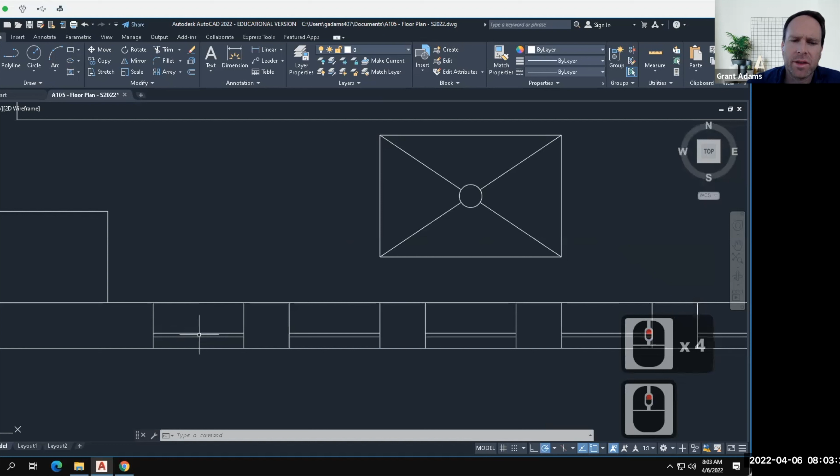Remember, the most basic window looks something like this. I've put 2 lines in for the double thickness of the glass. If you wanted to just do a single line, there's nothing wrong with that. And as of right now, everything that you've drawn is probably on the topography layer. And I think in this drawing, it's actually not on the topography layer. So let me switch it so that it matches what you're seeing. There we go. It's on the topography layer. And that's how you probably drew it.

Now, first thing we want to talk about today is layers and layer order and kind of how you organize your drawing. And so layers are something that we've obviously used in Photoshop and InDesign, Illustrator, but in AutoCAD, they become very, very important, and they're a key factor in how you organize your work. And if you go to work for, say, a firm, that firm is going to have a specific layer structure and a specific naming scheme that they tend to follow and that you'll be required to learn and or follow.

For our purposes today, we don't really have a set naming scheme that needs to be followed. You can name the layers anything you want. What I typically do is I tend to follow the most common practice of layer names. And so if we're going to follow a common practice, let me show you how to do it. So up here, we're in the home ribbon. At the top of the page, we have a big button that says layer properties.

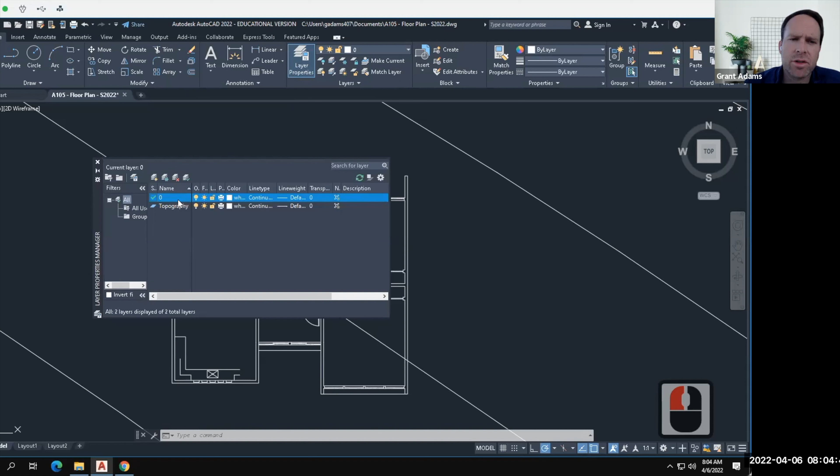If I were to click on that layer properties, it will bring up this layer properties manager little floating window here. And this layer properties manager shows us what our current layers are. So right now I have a layer 0 and I have a layer called topography. Yours is going to match up the same as mine. But we have some other information about these layers. So first off, we have an on and off switch. So it's a little light bulb that turns the layer on and off. If we turn the layer off, the content that's on that layer will turn off.

Next to that, we have a sun. And so this is something called freeze and thaw a layer. And this is actually a really strange holdback. I'm kind of surprised that they haven't gotten rid of this. This is a holdback to the really old days of AutoCAD. So think like in the 80s and 90s when AutoCAD was first around, it was really taxing on a computer to keep information stored in memory. So turning on and off a layer keeps the information on the layer in the computer's memory. It doesn't actually get rid of that information.

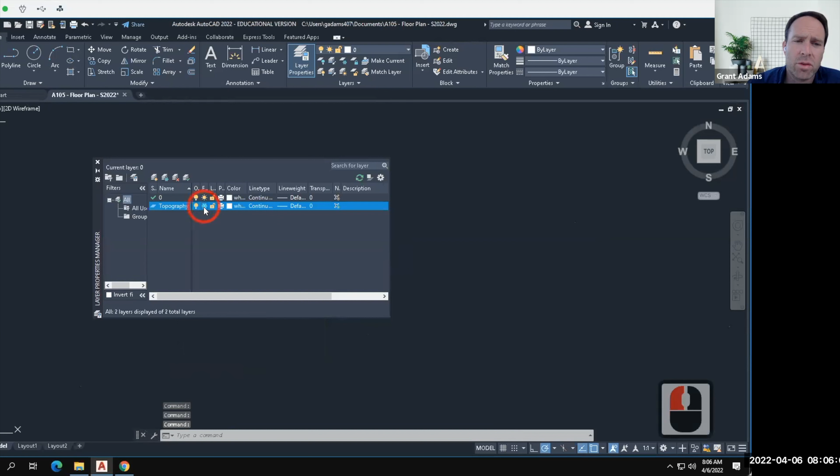And so they invented something called freeze and thaw. And when you freeze and thaw a layer, it actually takes the information of a layer out of the computer's memory, and then you put it back in when necessary. In our world today, computers are so powerful that it really doesn't make any difference whether you freeze and thaw or turn on and off a layer. It's not relevant, but it's a holdover, so it still exists. So the freeze and thaw, for your purposes, does exactly the same thing as the on and off.

So whether you use on and off or whether you use freeze and thaw doesn't really matter to me. I tend in lecture to use freeze and thaw because that's old school, and I learned AutoCAD in the 90s, so that's the way it is. Next to that, we have a lock button, and that padlock, when we lock it, will make it so that we can't select or trim or modify the layer that's been locked.

So we'll go ahead and unlock it so we can keep working with it. Next to that, we have a little printer icon, and this controls whether or not a layer is a printing layer, whether it will plot with the drawing or not. If I change this to not, and we were to print this, everything that's on this layer wouldn't be printed. And this is actually really beneficial long-term, and we'll be creating some layers that are non-printing layers on purpose, and I'll show you that when we get there.

Next thing we have is color. You see right now that the layer color is currently set to white. This white color is the one that turns black when we go to print. And so that's set to make it easier for us to draw and to see on the screen. It's set as white. You have the ability to change colors to any other color should you want to.

Some firms assign line weight by colors, so they have specific, basically thicknesses of lines that would be assigned to specific colors. I don't encourage us to do that in this class because that varies by firm, and so it's not as consistent as just assigning the line weights manually. So we will get to that a little bit later on.

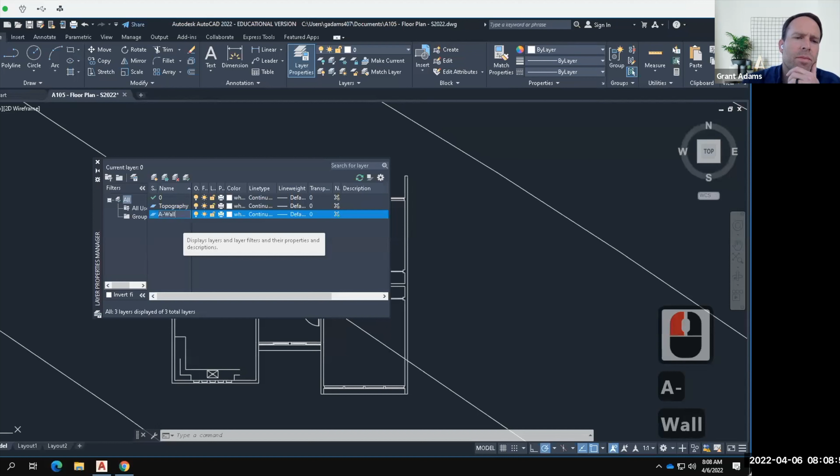So we want to separate our content out in a way that would be fairly traditional, and that is that we're going to keep the walls separate from the windows, separate from the doors, separate from the fixtures and content that's in the building. So my first layer, I'm going to rename it to be A-wall. And this is a pretty common practice where A denotes that this is an architectural input. So it's the architecture that's going on the layer A.

If you were an engineer, you would use E. If you were utilities or doing something like that, it would be U. If you were doing mechanical, it would be an M. So it's just a way of kind of organizing the layer. We're in architecture, so we're going to do A-wall as our first layer.

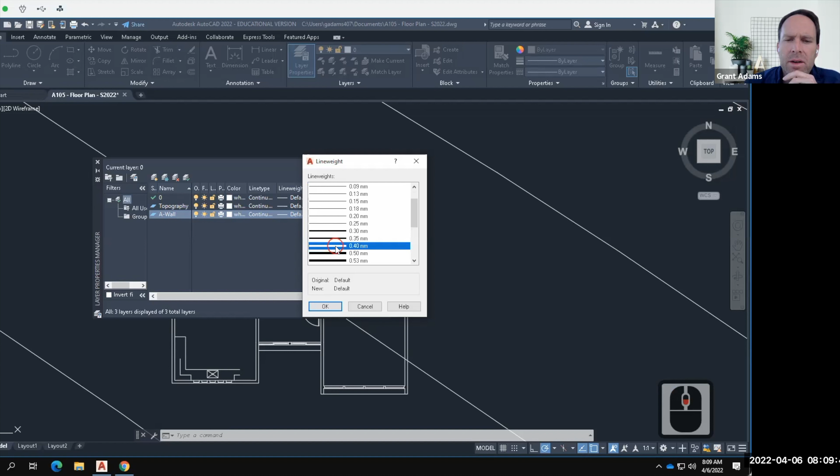Now, as we come over here, obviously we want the wall, everything to be on, but we want to change the thickness of the wall. And generally the thickness of the wall is the most thick in terms of a line weight. So I would come down here and I would say maybe 0.4 millimeters as our line weight would be appropriate. So I'll select 0.4 and I'll say, okay. And you'll see that my default line weight on that layer is now 0.4. That means anything that's on that layer will have a line weight of 0.4.

So we'll come back and we'll create some more layers, but let's talk about moving an object to a different layer. So let's close the Layer Properties Manager altogether. And now if I were to select a wall, so I'm dragging a little box through my wall here and I'm selecting some pieces of the wall. Once I have that wall selected, I would come up to my layer properties here, click this little drop down. Right now it says topography.

If I click that drop down and I choose A-wall, it's going to change all of those to the wall layer. Now I'm not actually seeing the line weights because they're not turned on, they're not enabled. They would show up when I print, but they're not enabled. If I wanted to see those, I could come down to these 3 lines in the bottom right corner. And oops, it's behind my Zoom window, so hang on for just a second. There we go.

When I do that, I could choose line weight, which turns on the button right here, and then click it and you'd see those lines get thicker. AutoCAD does not do a particularly good job of displaying line weights. Sometimes they look really fat, really thick, which is a little unrealistic long-term, but they're there and you can tell they were on a layer. I'm going to turn them back off for right now.

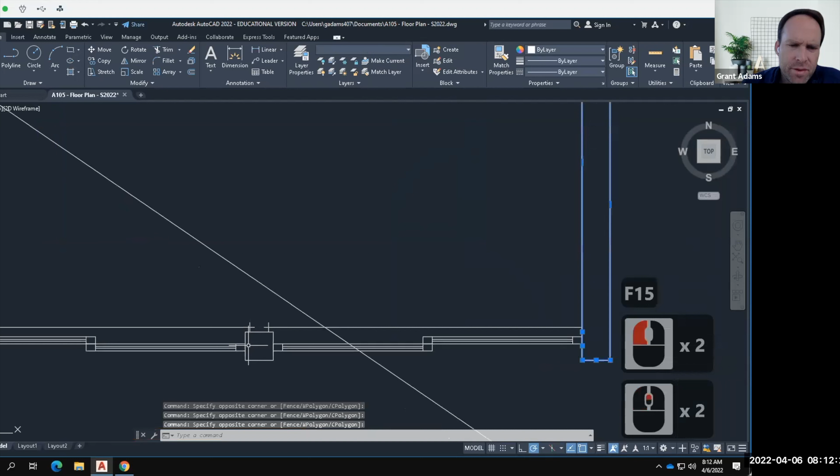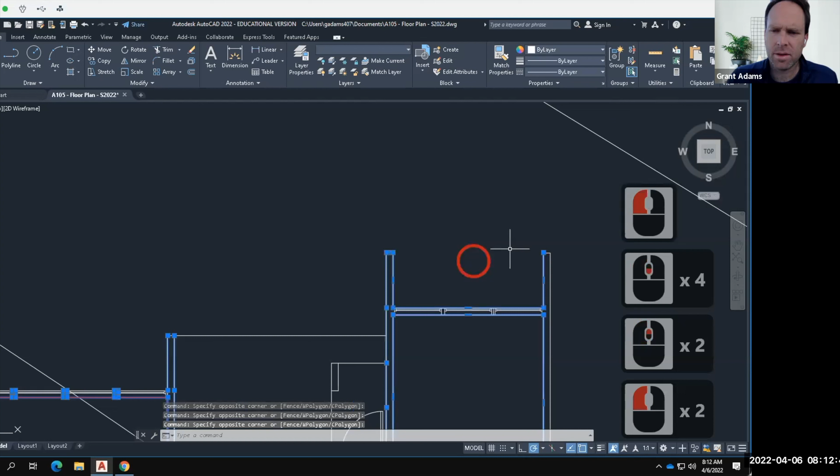I apologize, my connection to the remote desktop is a little slow today. I have to be patient while working with it, but let's get the rest of these. Come in here and get these little divisions.

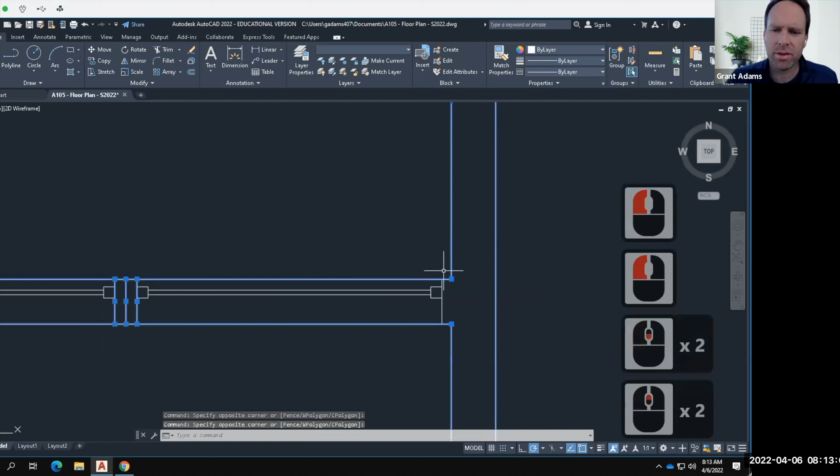So when we're looking at the walls layer, we want the lines that represent the sides of the windows to be selected in addition to the outsides of the walls, and those are all going to show up. Let's see, we've got that over here.

Remember, all I need to do to change this is go up to my layers, click this little drop down, and change to A wall, and we'll see all of those turn red. A little bit more, so bear with me as I get through the last of this.

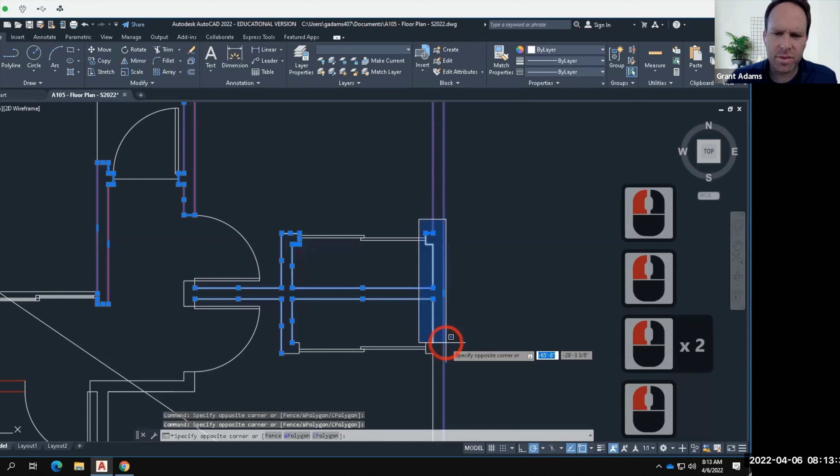It's always one of those fine balances where I want to make sure I'm including what I'm doing so you can see me do it, but I also hate wasting your time watching me click and click and click. So I apologize for that time delay, but it is what it is. Let's see here, let's do this.

We're almost there. Oh, looks like there's an error in my drawing. We'll have to fix that a little bit later. And we're almost there.

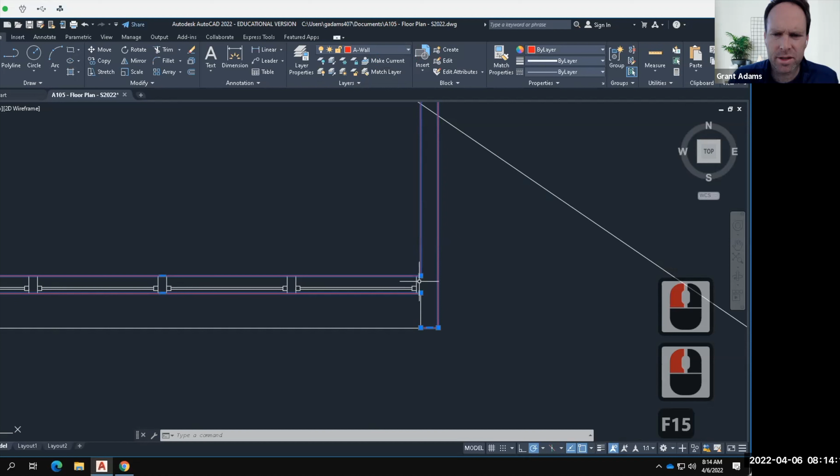Let's go ahead and change those all to the wall layer. One more quick selection here, and those would all be on the wall layer as well.

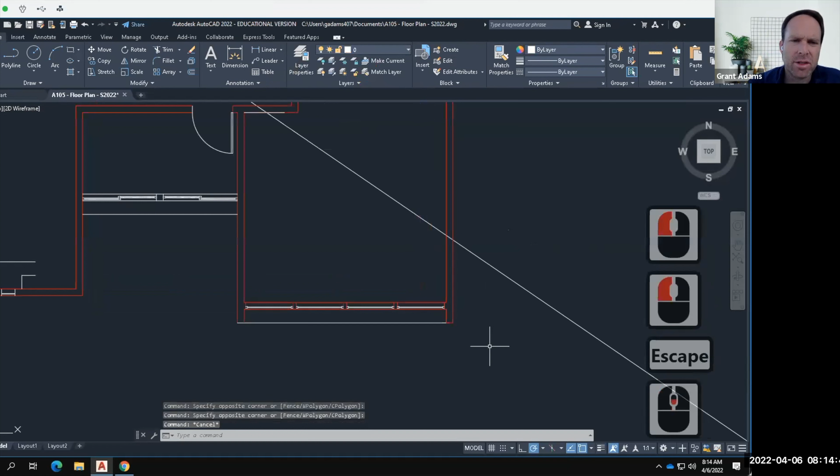Okay, so now I've officially gotten everything, I think, on the walls layer like it should be, except for that one little line. One of the things you'll find doing this is sometimes you miss a few lines, and you can always come back and get it. That's part of why changing the color temporarily is useful, because you can quickly see, oh, this was included, this wasn't, I made a mistake there, etc. So let's go ahead and get this one.

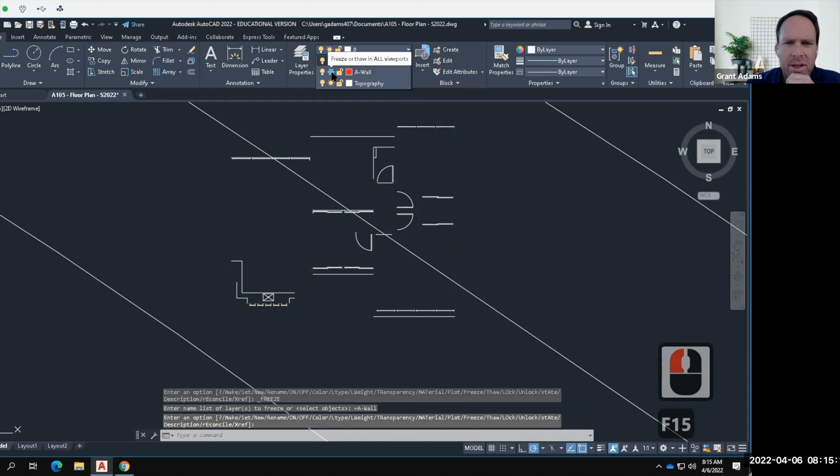And we'll change that one as well to the wall layer. Okay, so now I have the walls pretty much selected. Once they're on the walls layer, it makes life much easier because we can turn off — remember, I have the freeze and thaw button — I can turn off all the walls and then look at what's left. That would then make selecting the windows or doors that much easier.

So let's go back into my layer properties again, and we'll click on the little plus sign here to create a new layer. This is going to be A-door. And there it is. For our doors, this is something that can be helpful if we pull up the line weight guide that's attached to your...

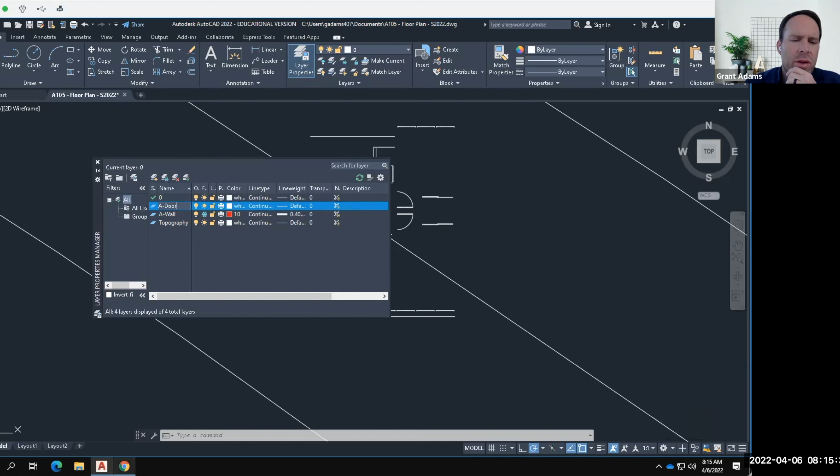And I apologize, I don't have... I'm not already logged in here. Hold on a second.

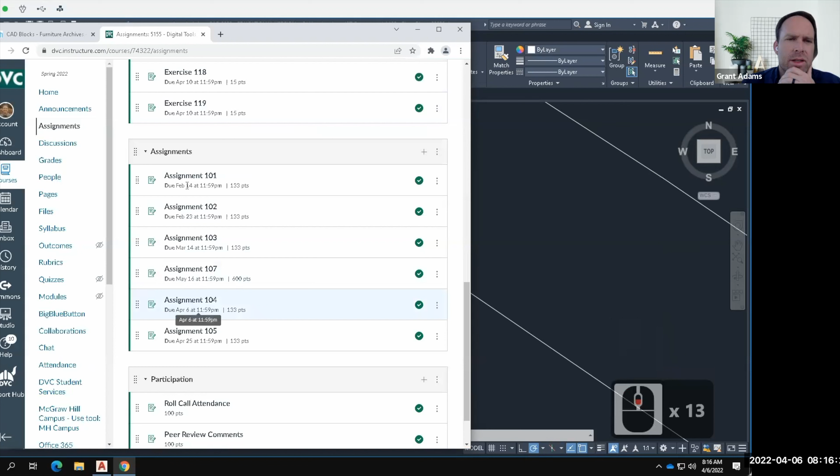Okay, so I included this as a guide for you so you can reference what appropriate line weights would be. Let's come down here into today's exercise, exercise 119. If we scroll down, this sheet will give you an idea of what the various line weights should be. So if we look over here at a wall, I have 0.4 millimeters in black.

So our window glass is 0.00. Our door — now in an ideal world you have different door thickness and door swing, I'm going to do everything at 0.18. So let's come back here, and my line weight for the A door layer is going to be 0.18. There it is, we'll go ahead and say okay.

Now all I have to do is select the doors and move those onto the layer. Remember, I turned off the walls, so that makes selecting the doors that much easier. So let's select these doors.

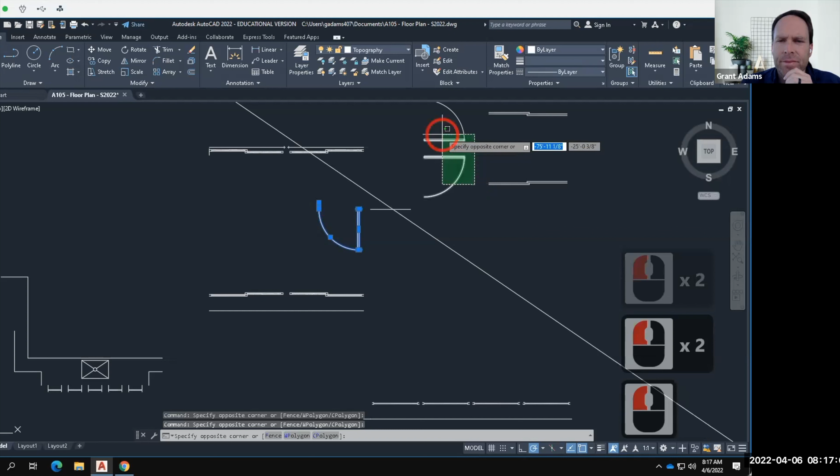All right, so those are all the doors. We can change those just the same way. We'll click that drop down and change to a door, and those are now on the door layer. I can turn off the door layer by clicking the freeze icon.

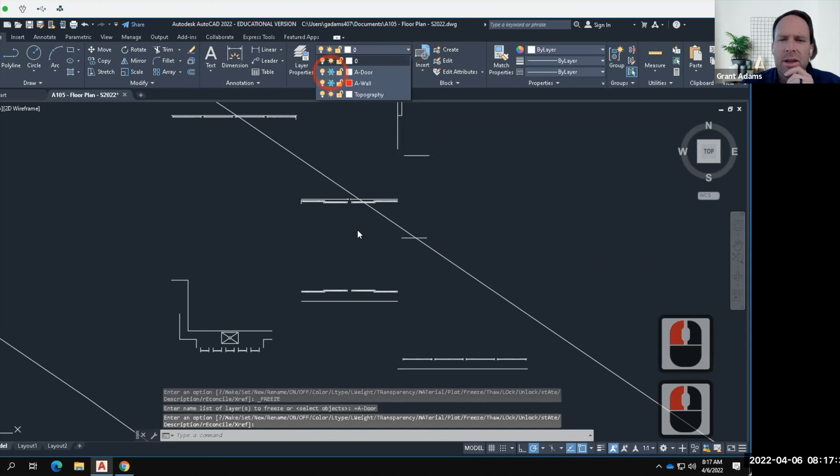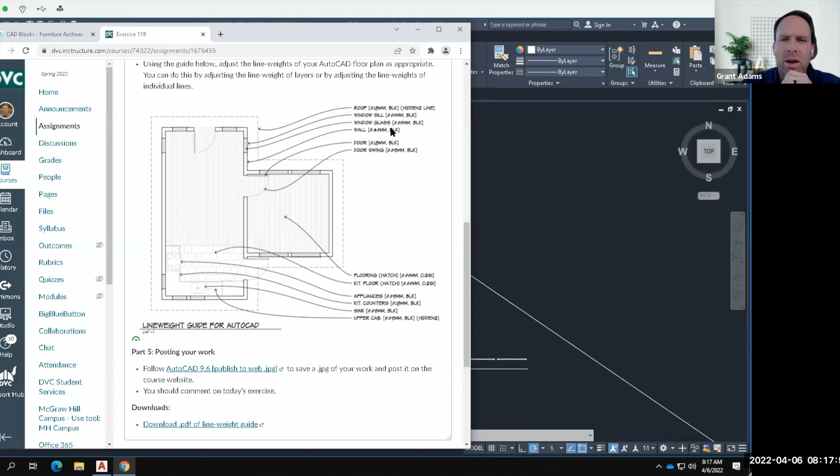So now I just have to go in, close this, and select all of those windows. Let's select those windows there, select these windows here, select these windows here. It looks like I missed a few lines.

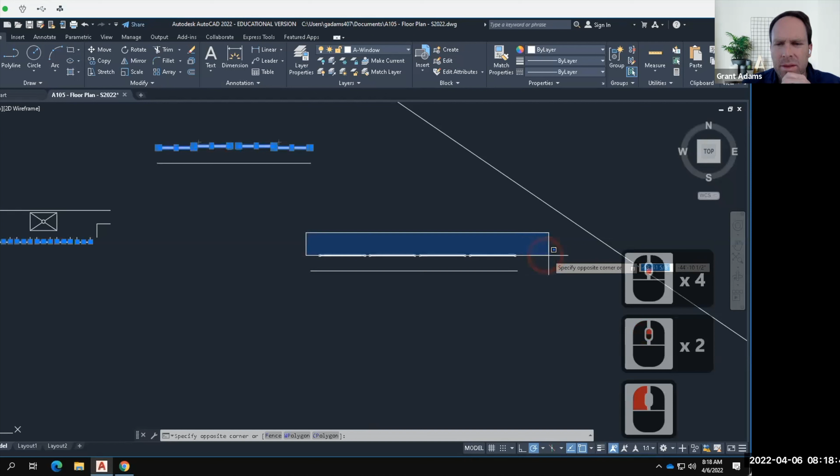It should only be the glass that's on the windows layer, so let's put all of those on the windows layer. There we go, all right, they're on the window layer. Oops, I missed these, so let's select all of these and put them on the window layer too. A window, perfect. So now I have all of those except for those windows on the windows layer.

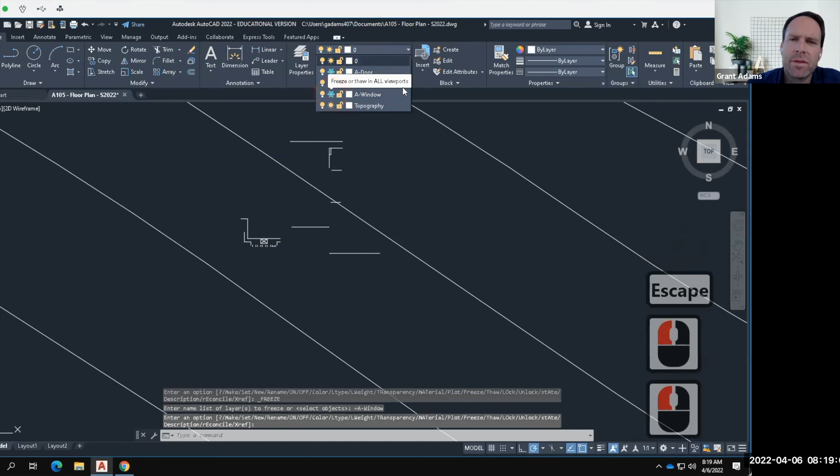So it takes a little bit of time to organize this, but you can see how once I start to have this set up, it makes it much, much easier to work with. So now as I'm turning these off, I can kind of see what I've missed. Looks like I missed a little section of wall right here that should go on the wall layer, so we'll select that and put it on the wall layer.

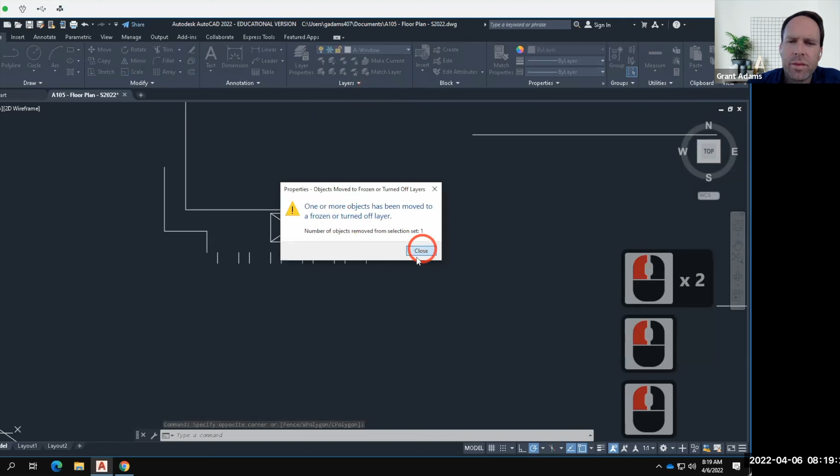All right, and oops, this is on the window layer. That's just warning me that my object is going to a layer that's turned off. So we're adding that to the wall layer there.

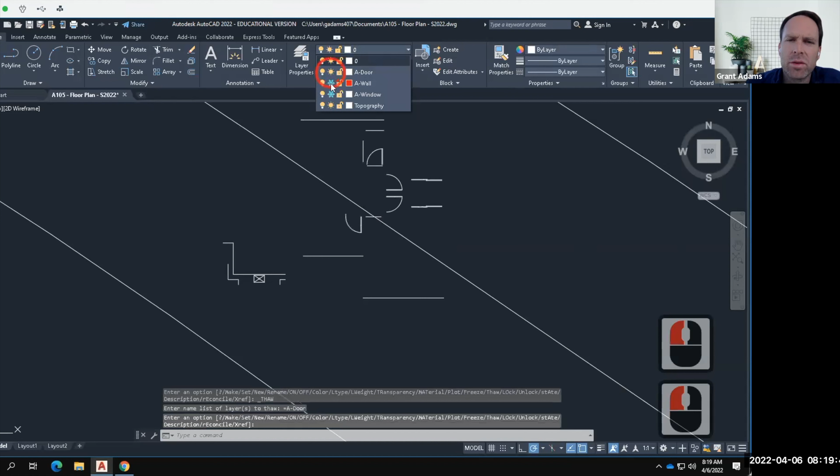Okay, so now that we have those relatively aligned, these extra lines are representative of other things in my floor plan. Let's go ahead and turn them back on. We'll turn back on the doors, we'll turn back on the walls, we'll turn back on the windows. Now we can kind of see the building as a whole again. So as we move forward, we may need other layers to start to identify what's going into our building.

For example, we have a kitchen that's been kind of laid out here, and so in this kitchen I may want to put those lines on a layer. I tend to do a layer called A-fixtures for things that are built in, so these are like kitchen cabinets and that sort of thing. And we'll leave them set.

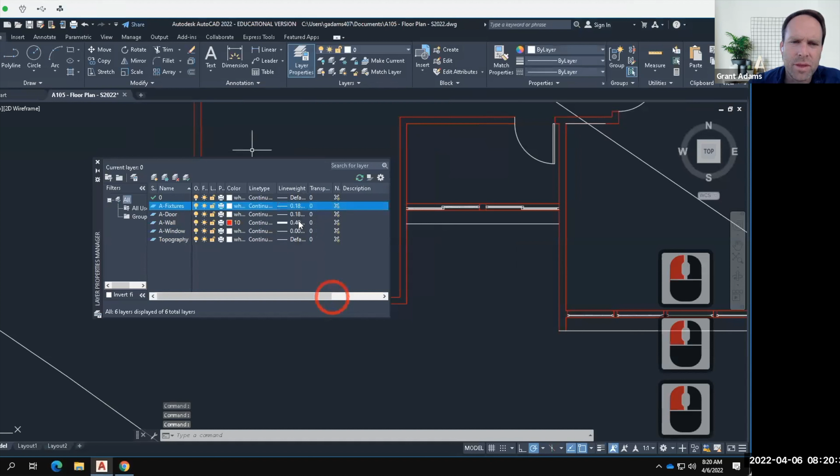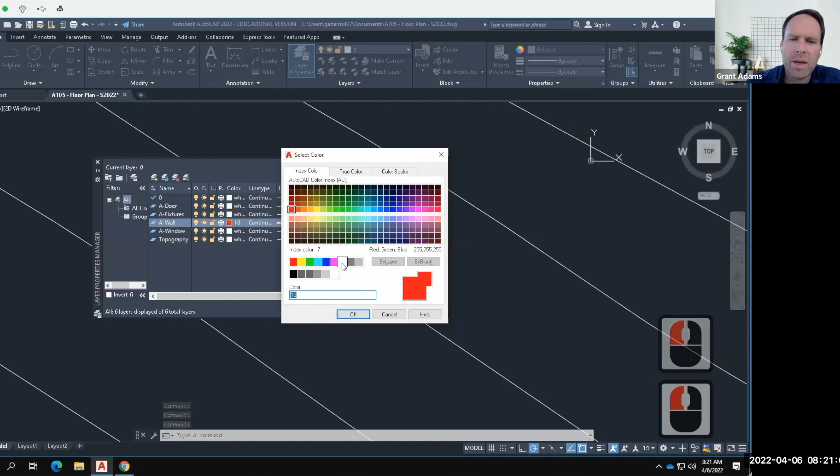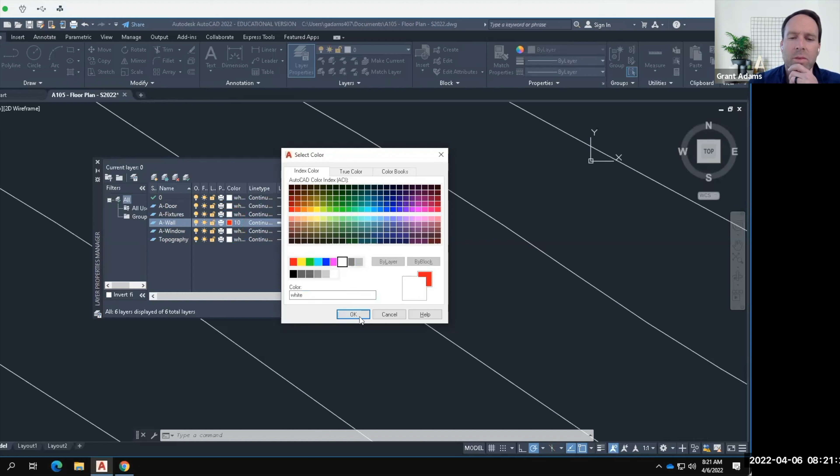So at this point, if I were to turn my walls layer back to white, it is important when I do that, we don't want to pick the white here. See that index color 255 at the bottom? That one will actually stay a very, very light gray on a print. We instead want to pick this one, index color 7 - that's the magic color that will turn black when we go to print it. Some of you, if you select the wrong one, will have trouble when printing because it won't show up. But that's okay, that's what I'm here for, so we can fix it.

Okay, so now all of those are back on. I could turn on my line weights temporarily. I can click the little line weights button here and we can see that yes, some line weights have been assigned. Anything below 0.3 are really not going to show up as line weights in AutoCAD - they just don't preview well.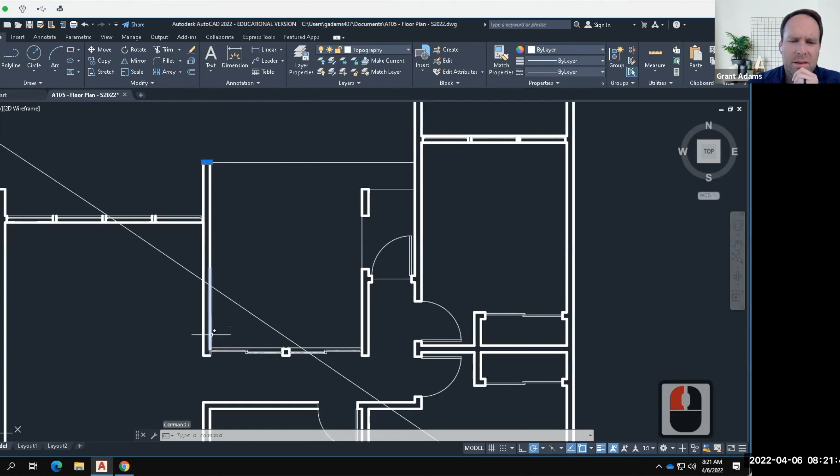It looks like there's a few little pieces that I missed, like that piece right there should be a wall. And there's always going to be some of those little details that need to be addressed as we go forward. So the next part of this is that you may want to include some furniture to represent what's happening in these rooms.

So for example, I have a kitchen here, maybe a bathroom here, and a couple bedrooms and a little bit of outdoor space. As I look at this, I may want to identify some furniture. Now, of course, we could draw furniture, like a couch or whatever.

We could also go to a manufacturer's website and see if they have an AutoCAD drawing to download. But what we're really looking for is something called a block. Lucky for us, AutoCAD is very universal, so there are lots of different blocks that people have already drawn that we can use. The website I'm going to recommend is First in Architecture, and I'm not asking you to buy anything. They do sell some blocks as a way of supporting themselves, but there are plenty of free ones. I'm only asking you to use the free ones.

So if we go to firstinarchitecture.co.uk, let's do it fresh here. It'll take us to this website, and they have some special stuff that they're working on, detail libraries, etc. We're going to go into CAD blocks, and you can see that they have CAD blocks for a bathroom.

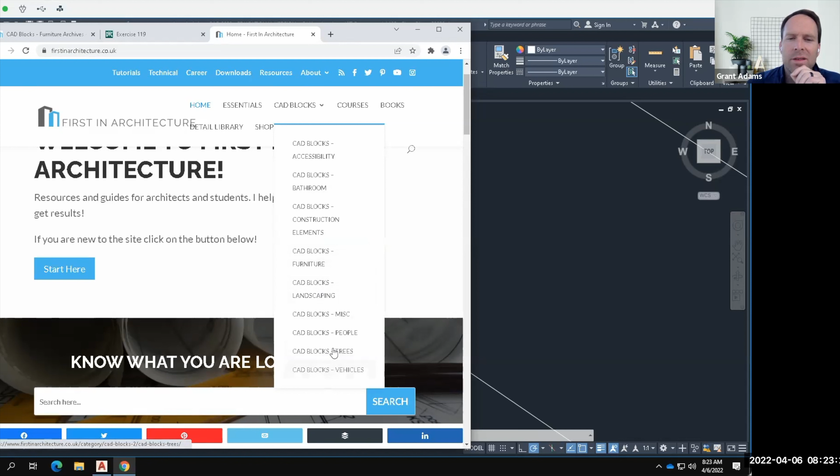You can see that some of these are listed for free, like island blocks, free wardrobe blocks. And if we keep scrolling down here, if they're not listed as free, you're not going to be able to use them. So here's free bed and mattress blocks. So we're to click on that.

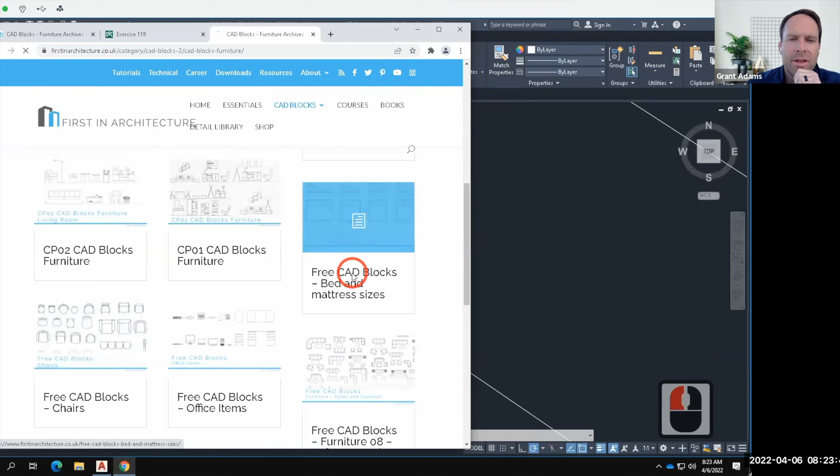There it is. We kind of get a preview of what we're seeing here, and then there's a button to download now, so we'll click on download now. This is downloaded as a zip file. So let's go ahead and show that in a folder.

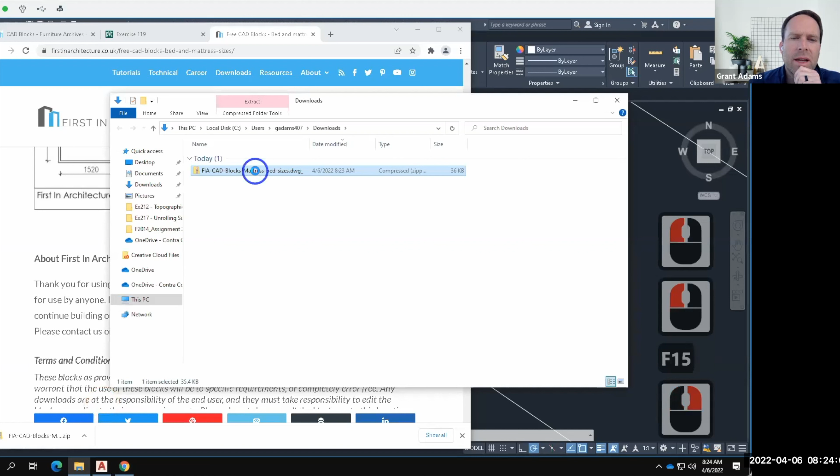There it is, and let's right click and say extract all. Now I encourage you to put these on your OneDrive in a resources folder. So I'll click on browse. I'm going to go to OneDrive. I already have a resources folder here. I have a folder for AutoCAD, and I have a folder for blocks. So these are all blocks that I've worked with before.

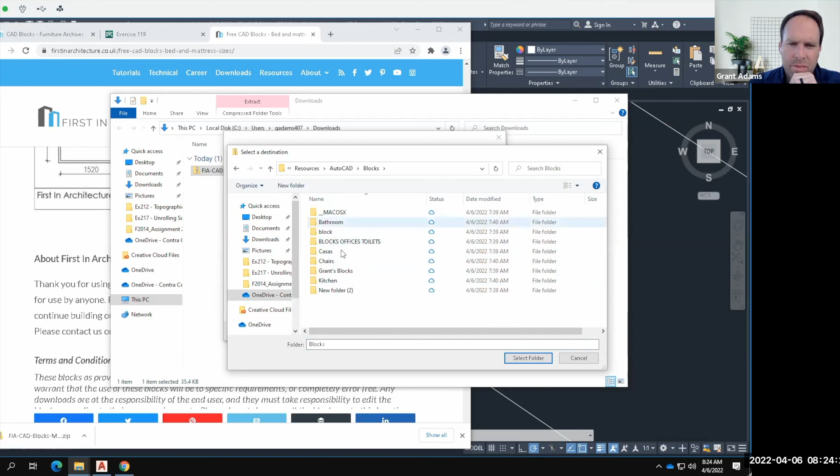So this is bedrooms. Let's go and create a new folder, and we'll call it beds. I'm going to extract everything into that folder, and we'll go ahead and click and extract. And there it is as an AutoCAD file.

Now we can open this file and see what's here. So if I were to double click it, we'll open it and we'll see what's here. There's a bunch of beds and bed sizes. And we could just take one of these beds and we could copy it.

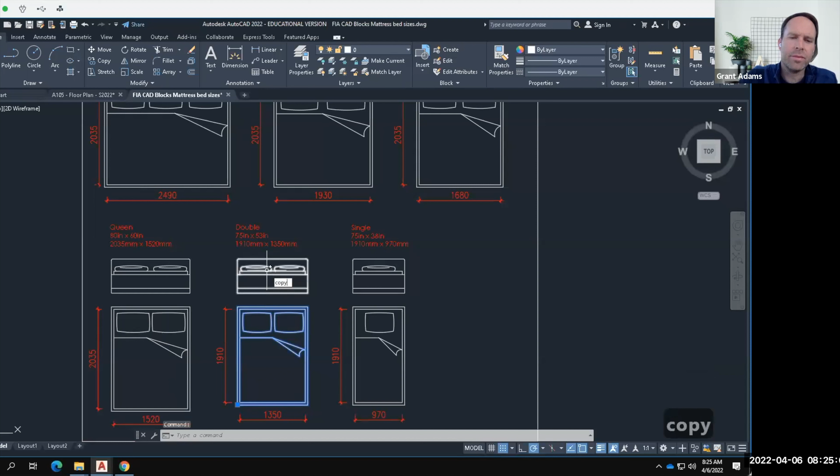So I could select it, and instead of the traditional copy command, I'm going to do copy clip. What that's doing is it's copying to the clipboard. And then I could jump over into my floor plan and I could type in paste clip. Paste clip, and then it would show up right here, like that.

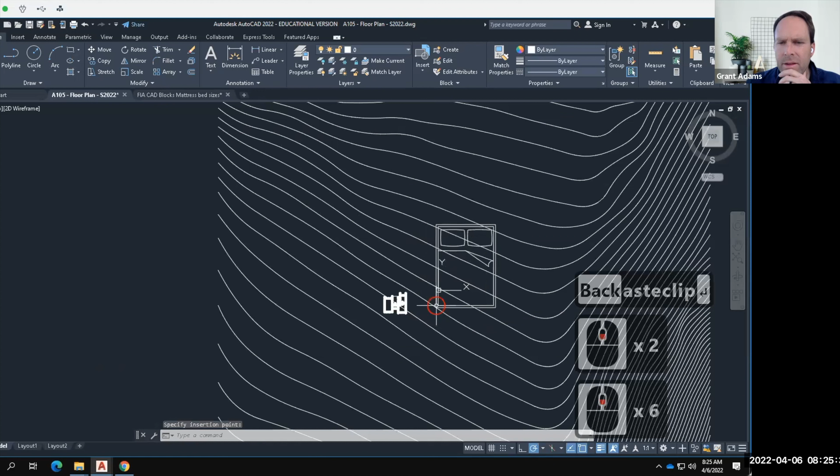Obviously, this size is way off. And that's one of the things that you'll run into, that sometimes when using these blocks, the sizes are not quite right. So we'll get to fixing that in a second. Let me go ahead and delete that.

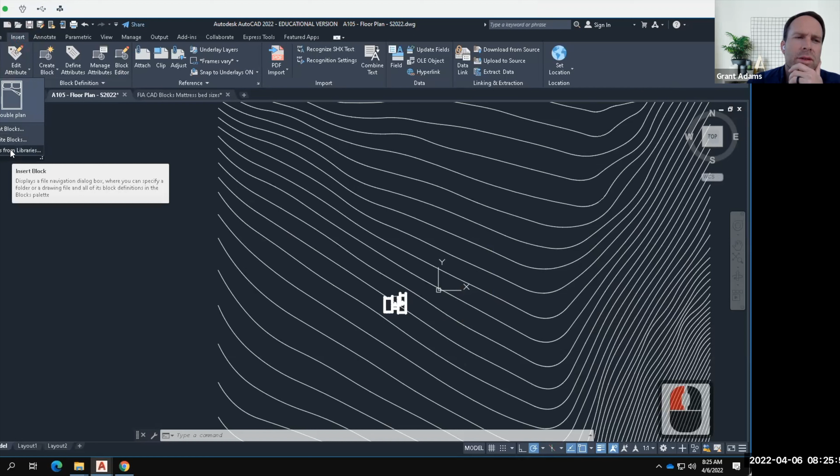The other thing that we can do is we can use this insert menu over here. If we use the insert menu, we can actually insert the block directly from its AutoCAD library. So we can say, let's go to blocks from libraries, and then we can choose, sorry, I have to get back to my OneDrive, and we can go to my folder, oh sorry, it's in resources.

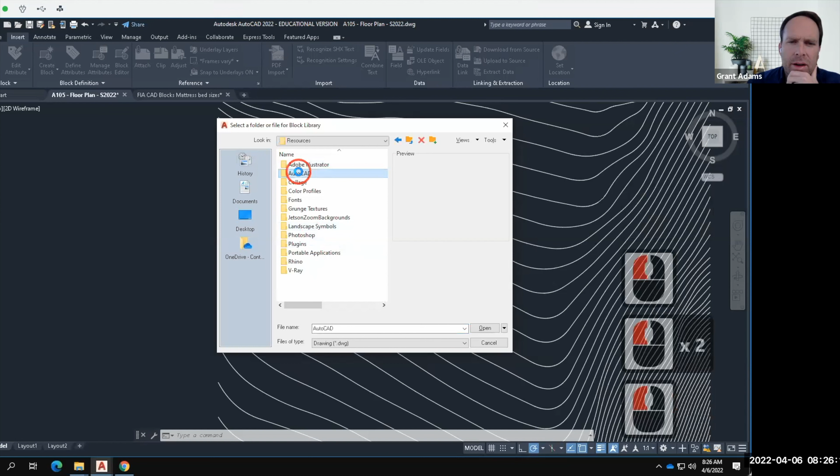And let me go to AutoCAD, let me go to blocks, and go to beds, and I could pick this, let's say open. And it's going to bring in, sorry, this is behind my Zoom window here, it's going to bring in all of these beds that I could use. So I could, for example, use the Queen plan here.

I can right click and I can say insert, and there it is. Now, when I did it this way, my scaling worked, so that's an appropriate scaling. So it might be a little bit better to do it this way. So let me go ahead and stick it in this room.

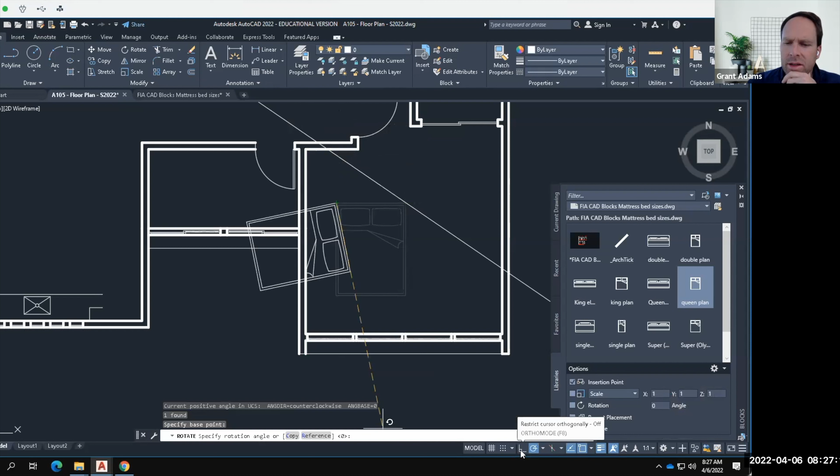That's a queen bed. We could rotate this. It works just like any object. I can type rotate, or under the home ribbon, I could choose rotate right there. And we're going to rotate this. Let's rotate it this way. If I want it to jump to 90 degrees, I can turn on this little ortho line, like that. And then we can move this.

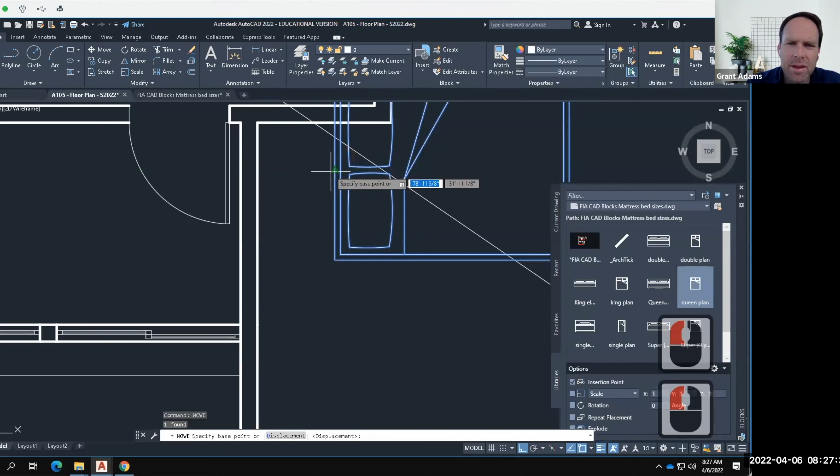I'm going to move it from the center of the bed, I hope. Oh, I don't have midpoint turned on. So let me go down to my object snaps. I'm going to check the box for midpoint. And now I can snap to the middle of this bed and put that on the middle of this wall, I hope.

Not quite, but probably close enough. Move it down just a little bit more. My mouse jumped on me. Let's move it over. All right, and there's my queen bed. Then I could come back over here and I could say, you know what? I want to do a different size bed.

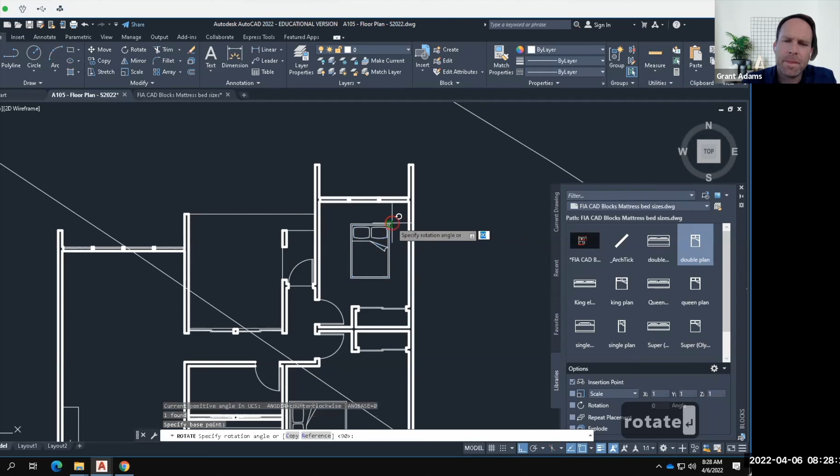Let's do a double. I can right click on it and I can say insert. And there's that bed. And maybe that one goes in this room. And then we'll rotate that one again. So I'll type rotate. And one of the great things about bringing furniture in like this is you see very quickly how big your room is and whether it really accommodates what you think it will.

So let's go right there to right there. And there's that bed in the room. So this room probably could accommodate a king without a problem, but this room really is kind of stuck at a double or a queen.

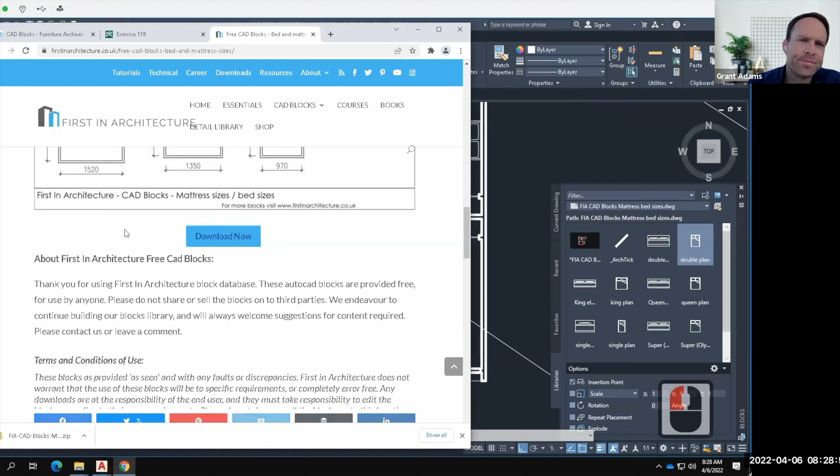So let's look at the rest of the things that we might want to download. Let me click on this. Back to the First in Architecture library. You can, of course, do a Google search for any number of AutoCAD blocks. But here we have free CAD blocks for chairs. Here's sofas and couches. Let's try that one. So I'll click on that. We'll come down here a little bit further. We see all the previews there.

In this case, we want to download the imperial, not the metric, because the imperial are going to be the ones that are in feet and inches. So we'll click on download imperial. And there they are. Go ahead and show them in their folder. I'll right click to extract. I'll say extract all. And again, I want to make sure that they go on to my OneDrive in my resources folder. And I keep them in the resources folder because typically we're going to reuse these over and over again.

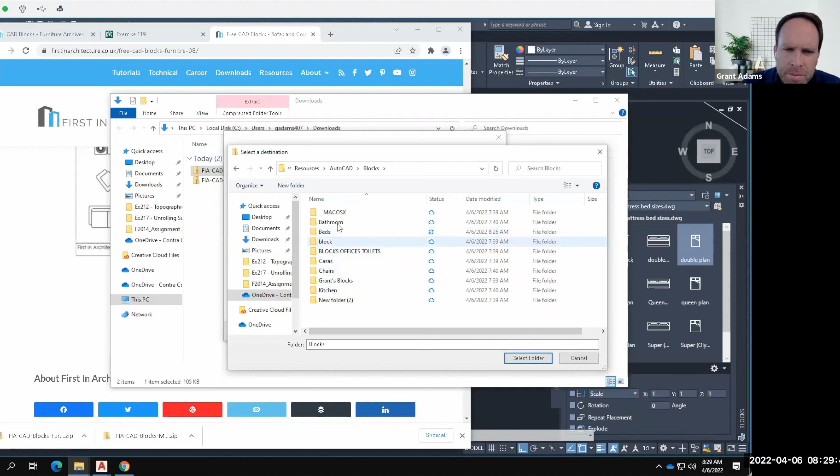So let's see here. How do I not have a folder for couches? All right, and then I'll go ahead and click on the select folder and then choose extract. And there they are. So we can come back here. And once again, I'll go to the insert tab. I'll click this little down arrow. And I'm going to go to blocks from libraries.

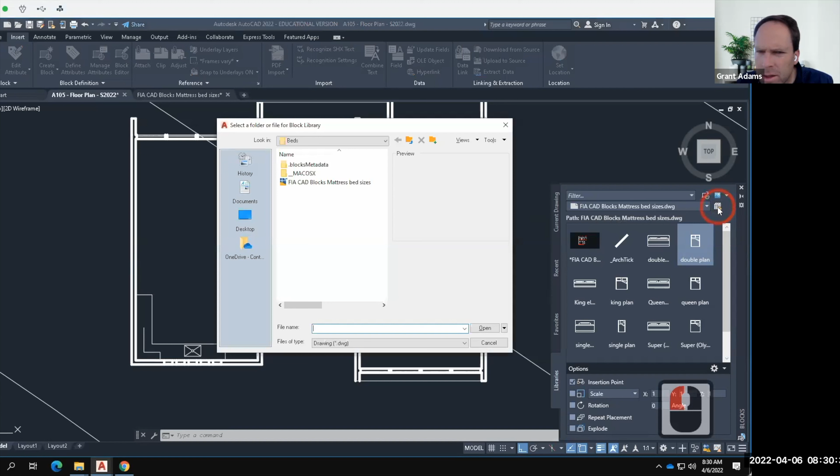And that just opens this. And I'm going to have to open a new library. So I'm going to click that little, it looks like some books on a shelf. And we're going to go back out of that and we'll go to my couches. And then we'll choose open there. And it's loading, so give it a second. And there they all are.

So just in the same way here, I can come down and I could choose any one of these sofas. So let's say I like this sofa. I could right click and say insert. And there it is. And I could put that sofa into my room right there. We can come down here. Maybe I don't like that. I would rather have a configuration of sofas. Let's try that. Right click and insert.

Those are much, much bigger. So I might not do those. But this is again the options where we can play around with. Let me right click and say insert that one. Yeah, that one might be good. Maybe I'd rather have this one there. And then we can get rid of this. So you can play around with these options and kind of sort it out.

And maybe I want it to be, let's rotate it. And I'm going to type in 180 so that it flips the other direction. I could mirror it as well. And let's move this. And let's kind of assume that we would want that to be looking out the view. So I'm just orienting it slightly differently.

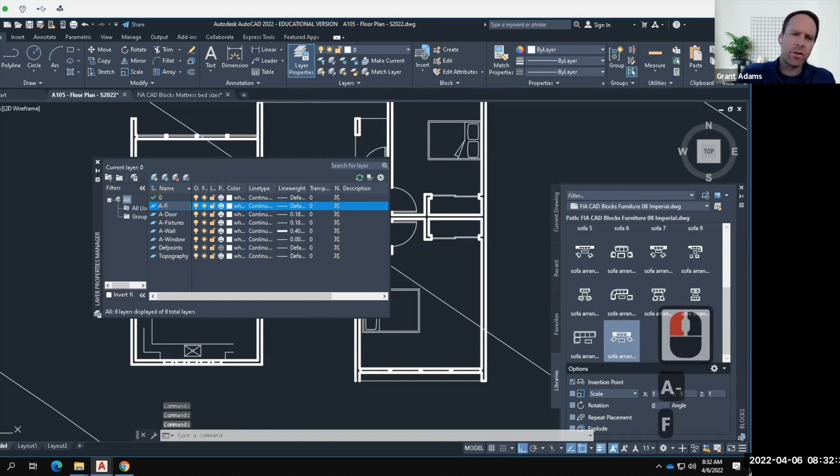So let's go back to our layer properties. Let's click the little new layer. And I usually do A-Furn for furniture. I'm going to set my default line weight at 0.00 for that one. We'll close it, and I'm going to take each one of these blocks that are furniture, and I will put those on the A-Furn layer, like that.

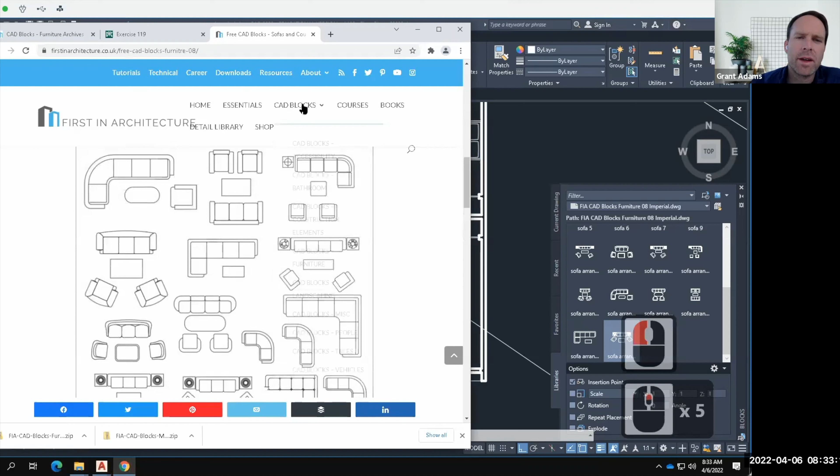So there are blocks that have kitchen appliances in them. There's blocks for pretty much anything that you could be after. There's bathroom, toilets, etc. I mean, once we've done them once, you can see that they're available over and over again, and it's really the same process. So I could go here to the bathroom. There's free bathroom blocks, right? So I could download those, and now I have bathroom blocks.

There are some blocks that have some unique properties to them. They might have a little selection where you can change what one of them looks like. So depending on where you find them, you may end up kind of experiencing that. If, for example, I were to load one of mine in here, this is one that I actually created myself. Right? It has a bed in it. I can insert this bed like that. So there's a bed, little fancier because it's got all the pillows and stuff on it.

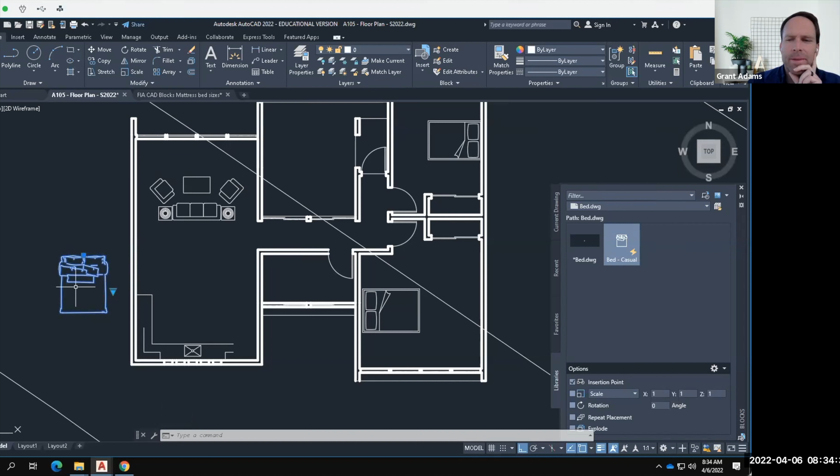But this has the option right here to change the bed size. So I have different types of beds. I can go all the way up to a king bed, and it's going to change between one and another. So it's a special type of block that has basically options for how you wanted to create something. So I like to point that out because some blocks have that little down triangle, and you could use that if you wanted to. If anybody's interested in this block, I'm happy to give it to you going forward, but that's how it works.

Okay, so after that, we've got our layers, we've got our line weights, we've inserted our blocks, and again, there would be more blocks in this. The next thing that may be beneficial is to actually add some color to these walls to make them stand out a little bit more. And we can do that by using the hatch tool. In previous lectures, I've used the hatch tool to do flooring. I've found that, especially in these later versions of AutoCAD, a lot of times it crashes and it doesn't do well around the block. So I'm going to stop showing that as an example. Instead, we're just going to use a hatch for inside the wall.

And I'll do that by using the hatch command. It's available right here. You could also type in hatch. If I click on it, it has a whole bunch of patterns. And so these may be beneficial when we go to do the elevations, for example. But the one we're going to use today is just solid. So I'll click on solid. And then when we look at the hatch, it says pick an internal point. So all I need to do is click inside of my walls, and you'll see that it will fill in my wall. Actually, it kind of previews it when I move over it with a fill color.

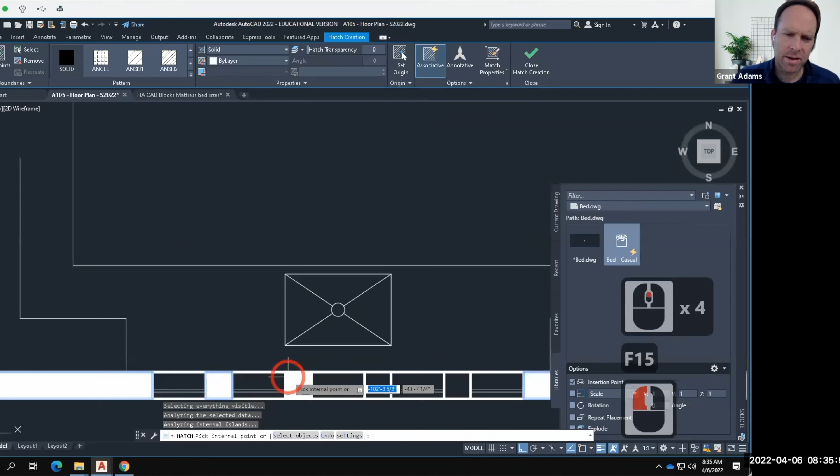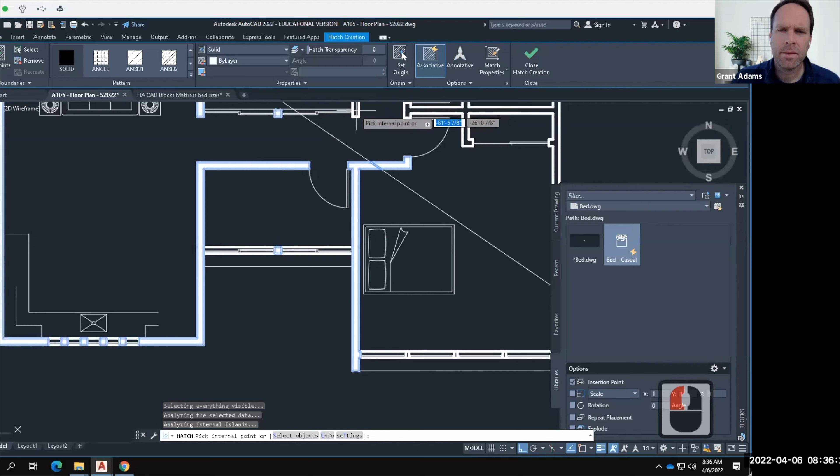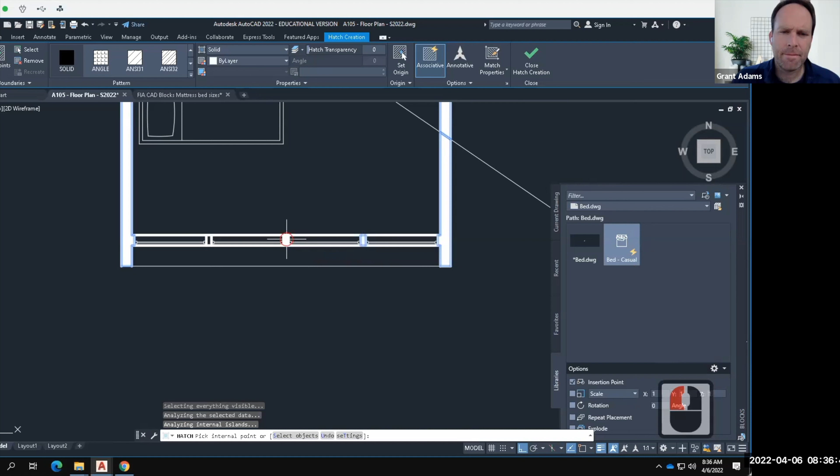So I'll go through, oops, and I'll look for all of my walls. You may end up needing to zoom in a little bit here so you can see. I'll fill that in. Like that. If you make a mistake, you can press Control Z. Hold on, almost done. There. And there. There. A few more to go.

Sometimes when you hover over, it won't fill in, it won't preview. That's because part of the fill is going off of your view window, and so it won't let you fill it in. Almost done. All right, so I believe I got it all. When I'm done, I'll go ahead and press enter, and it's now filled in all of my walls.

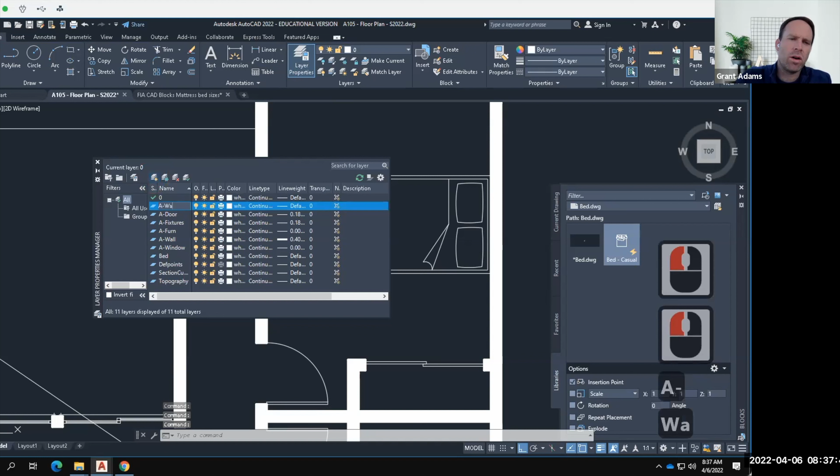Now, I've found that instead of having this as a really dark black fill, sometimes it's nice to change that color a little bit. So let's go ahead and put it on its own layer. So let's go here, we'll go to our layer properties. I'm going to create a new layer, and I call this A-wall fill. You could put a little hyphen if that helps. I'll set my line weight at 0.00. By the way, 0.00 isn't actually nothing. It's just meaning it's the thinnest line AutoCAD can produce.

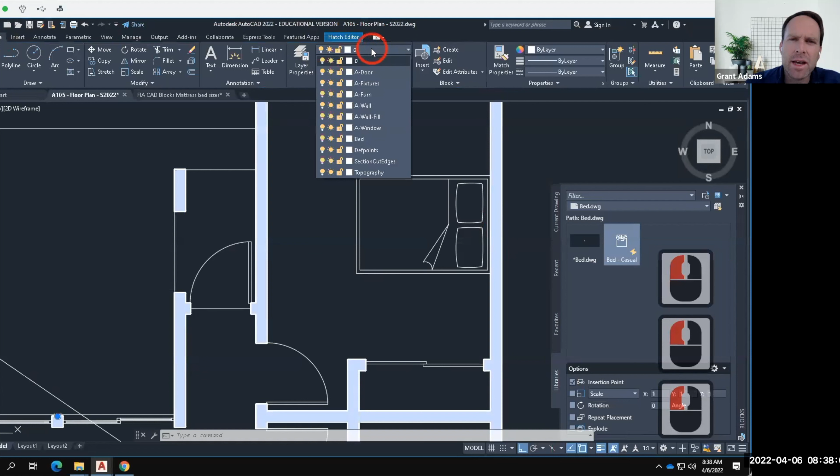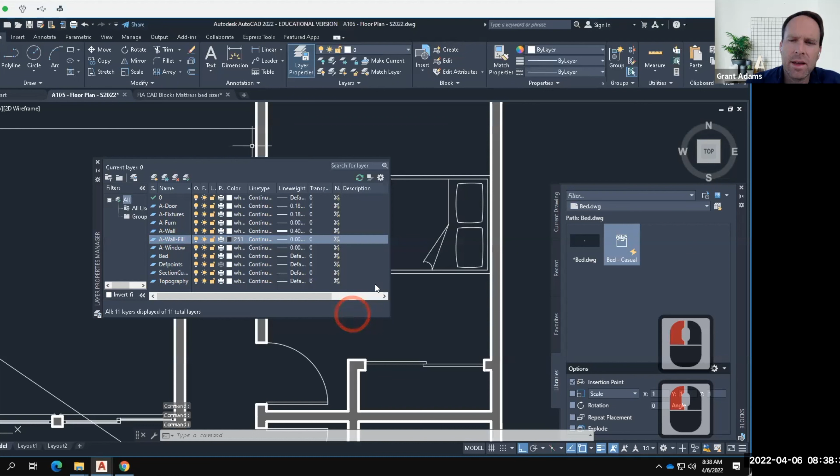Okay, so let's take my hatch. Oh, sorry, I have to close my layer properties here. We'll go back to my home ribbon and we'll change that into the A-wall fill. And then let's take the wall fill layer right here, and instead of having it as white, which will end up printing as black, let's use one of the grays. So I like 251 for this. So I'll come down here to the grays, I'll pick 251 gray, and I'll say okay. And that then fills in the walls, but they're kind of a dark gray rather than a black, which I think sometimes looks a little bit better.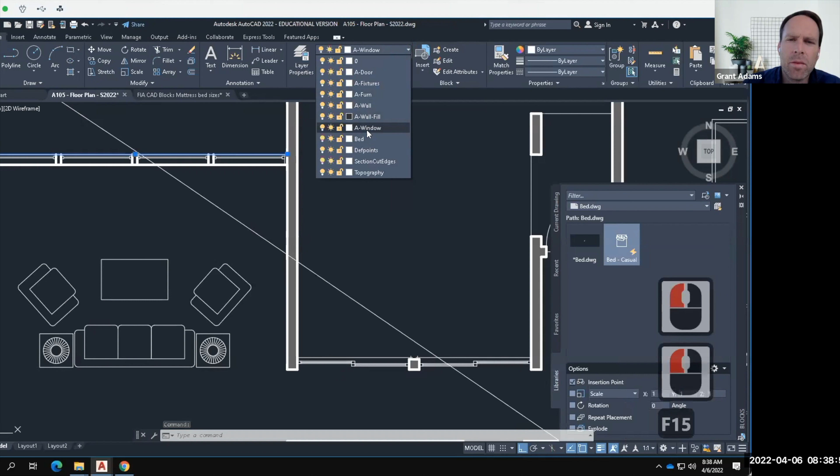All right, so I have my walls filled, that's good. Looks like I didn't fill those sections, so I may need to come back. Also, this looks like it needs to be on the wall layer, as does that little piece right there. I can come back and fill those in a little bit later. Go to a wall, there we go.

So the other thing is that sometimes you want to represent something that's above in plan. So remember, a plan is cut at about 4 feet above the floor. And we cut a plan at 4 feet above the floor because that includes the lower kitchen counters, for example. It's above where most of the furniture would be, it goes through most of the windows, it goes through the doors, but it's not so high that we're missing things like windows or doors or what have you.

So we want to make sure that we're identifying things that are above where we cut that floor plan. So things that are above would be things like the upper cabinets. These guys right here, those would be upper cabinets. And they're typically displayed using a dashed line. And so if we wanted to convert those to a dashed line, we can select them and then come over here into the properties. We don't have to do it for a whole layer. We're just doing it for the individual lines.

We can come over here to our layer properties. And right now we just have by layer, by block, or continuous. So we need to load another one. So let's go to other. And then we can choose load. And you can see that AutoCAD has a ton of different line types that are included in here. The one that I like to use is this one. It's called Hidden 2 or 0.5x. It's a little bit smaller of a dash. And so we'll go ahead and load that one in.

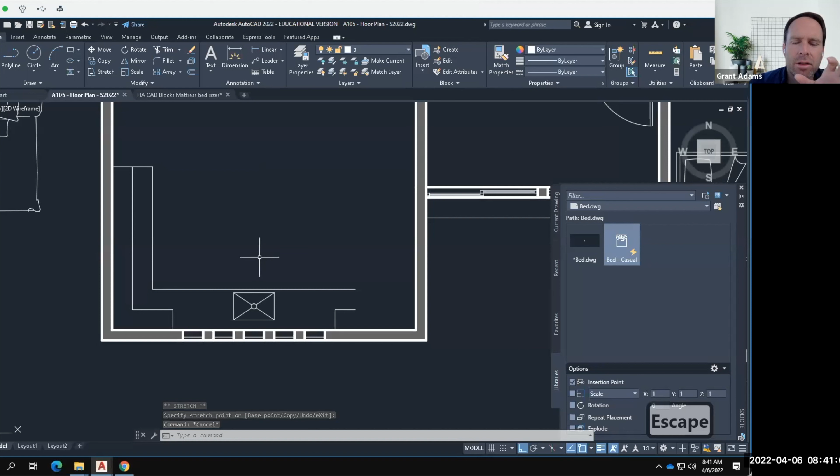And I'll say okay. And then all we have to do is select our lines now that those are loaded. Select those, and then we'll come over here and change to Hidden 2. Now, you guys are probably saying, well, wait a minute, they didn't change at all. And that's true, they didn't change. They don't change in this model space where we're seeing them. They will, however, change when we go to print them. So once the drawing is scaled, you'll start to see those show up. So it's kind of a weird one because you can't see it yet. When we get to paper space and model space, then we'll be able to do it.

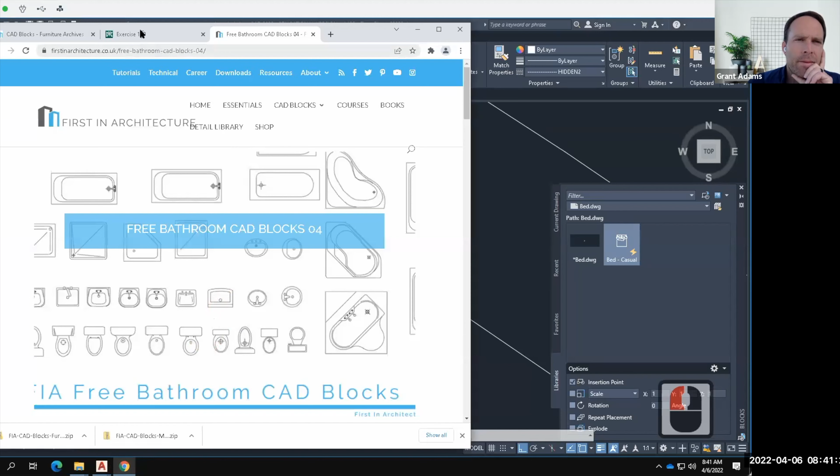I have a couple overhangs that are showing up here as well. So I want to take those overhangs and make sure that they're dashed lines. So I'll select those and I'll go ahead and do Hidden 2. Oops, sorry about that. This is equivalent to this dashed line that goes around the outside of my building. All right, that's the roof line. So I'm not going all the way around.

You'll see when I do this roof that it's a little bit different, but I've gone ahead and I've changed those line types. Again, if you don't see these yet, we can come back and do these again when we get a little bit further along. Once we do the building elevations, then we'll ultimately be doing our layouts, in which case we can come back and make these kinds of corrections. So my goal for you today is to have a floor plan that has furniture in it being brought in by blocks, and also to have line weights appropriately installed, maybe using a solid hatch on the walls themselves so you can kind of see the thickness.

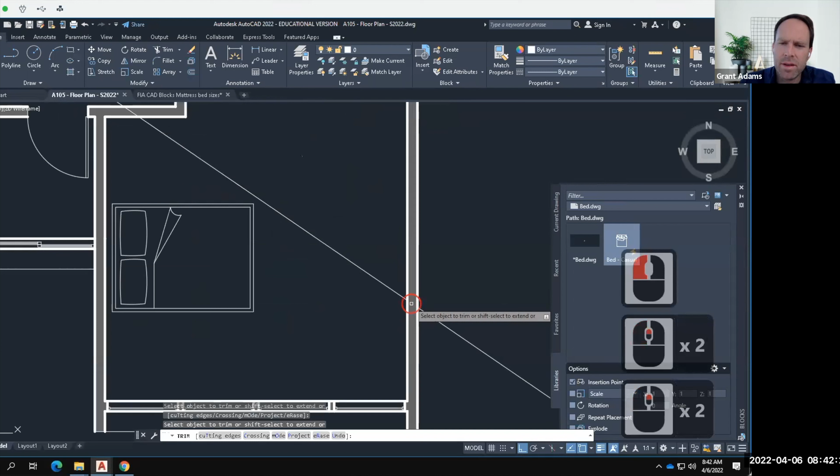Oh, the one other thing I should say is that these topo lines currently go through the building. And so we might want to trim those out. I have that one topo line. You may have multiple topo lines. I can use the trim command, which we've done before. I'll click on trim. And I can come in here and I can trim that topo line. And all I'm doing is I'm trimming the end. So I come here and I trim that end right there. And now that I have those two trimmed, I'll hit enter.

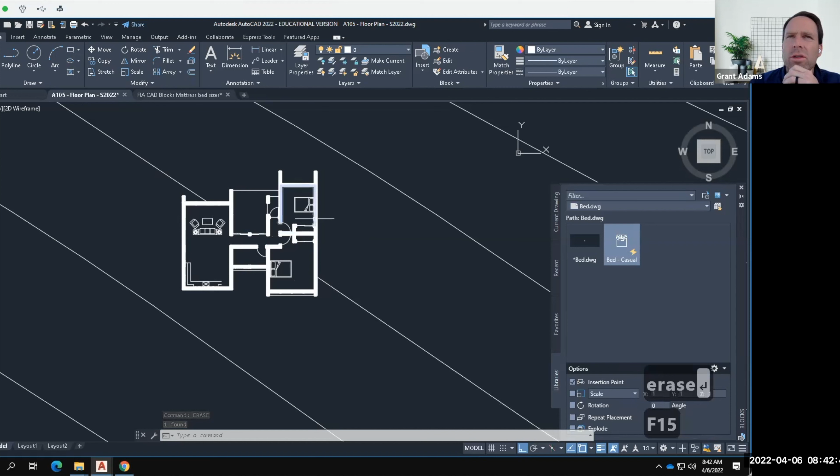I can then select the middle section of the line and actually press the delete key, or type erase if you're on a Mac, and that can go away. So we want to make sure that topo line doesn't cross through our building anymore. Okay, so that's now done. Let's go ahead and save my work. I'll click the little save icon here. I'll make sure it finishes its save.

And then let's talk about, sorry for the background noise. Hold on one second.

All right, there we go. The background noise hopefully abated a little bit.

Okay, so now the last thing to do would be to print this. So I want a JPEG as what you're turning in as part of this exercise. You can, of course, print the JPEG, which is what I'm going to show you how to do, or you could screen capture this. If you'd rather just take a screen capture, there's nothing wrong with that, and turn that in for your work. But let's go ahead and show you the print process again.

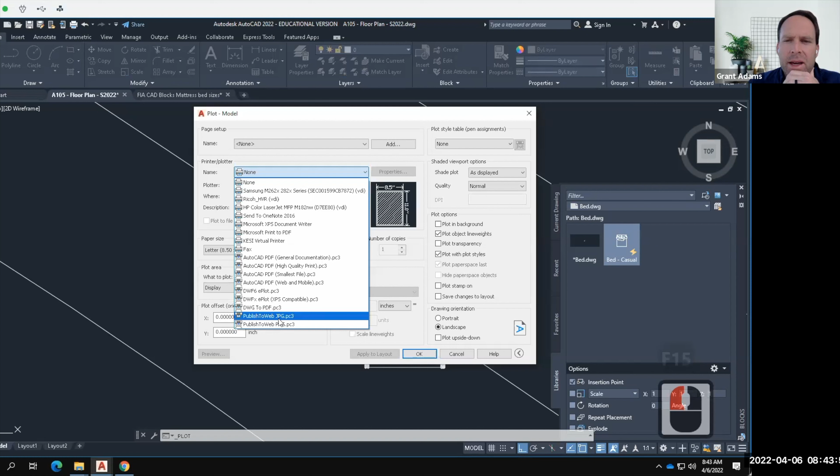I'm going to click the little printer icon, which in AutoCAD is called plot. Then, under the printer plotter name, I'm going to choose this down here at the bottom, publish to web JPEG. I'll use my default paper size, that's good. Now, one thing that we didn't do last time is under this plot style table, we want to choose the first option, the acad.ctb.

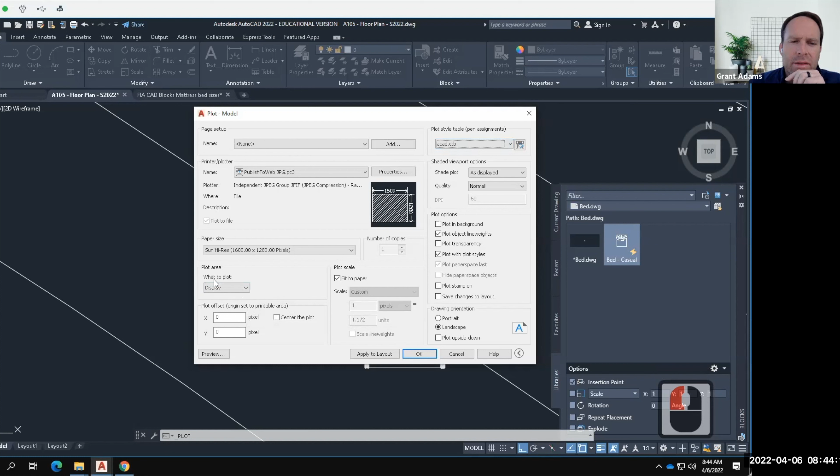So we'll change that. Now we can go ahead and select, we can do the display, or I could pick a window. Let's pick a window so I can pick around my building here. I like that. Perfect. And then we'll go ahead and say, okay. It'll ask us where we want to save it. I'm going to put it in my OneDrive in today's folder, wrong class. And let's see, we're in 119. And there it is. I'll go ahead and click on save.

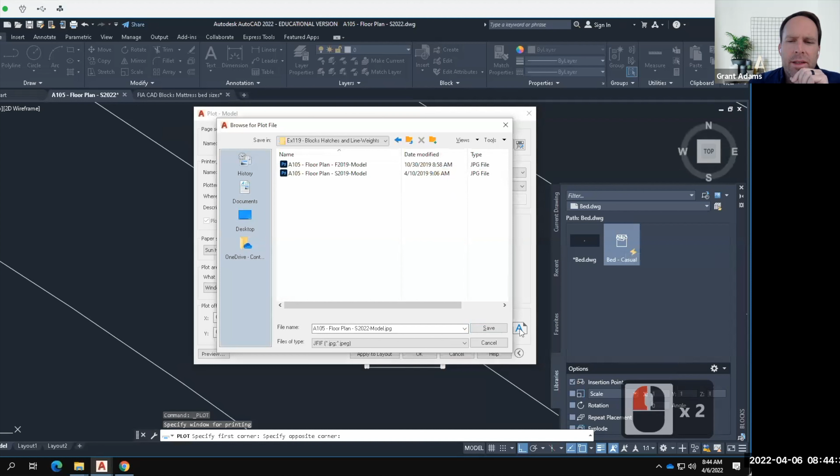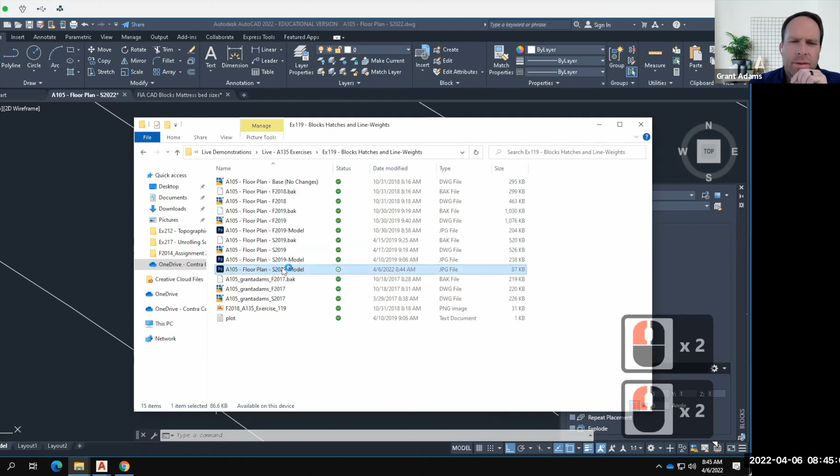Perfect. And then when you go to turn it in, that's what I'd be looking for. So let's go ahead and look at it here, just so you can see it. Oh, of course, it's going to open Photoshop. Hang on a second. Oh, come on, Photoshop.

And there it is. So we can see that it does in fact have our line weights installed. Everything looks pretty good, and this is feeling like a pretty good floor plan for right now. I don't remember whether I specifically taught you. Yeah, I did teach you about the doors, so we're good.

Okay, so at this point, I'm going to let you guys go unless anybody has any questions. Let me stop my share and we'll wrap up here. The key here is to get as far as you can on the floor plan and be ready for next class. I will stick around for the next 30, 40 minutes in case anybody has any questions. Remember, we don't have the check-ins today. So spend your time getting your floor plan done. But if anybody has any questions, I'll be here. Let me know, and we'll go from there. Are there any questions before I let everybody go?

Yeah, I do actually. Sure. I was going to incorporate sliding glass doors. I took an engineering class last semester, and it's kind of like the window, but it was like 2 lines and then 2 dash marks. Is it going to be the same as that? Yes, that's exactly how you would do it. You may also find that you can find a block of a sliding glass door, so you don't have to draw it. But there's nothing wrong with just drawing it. Basically, it's 2 overlapping lines. It's very, very close.

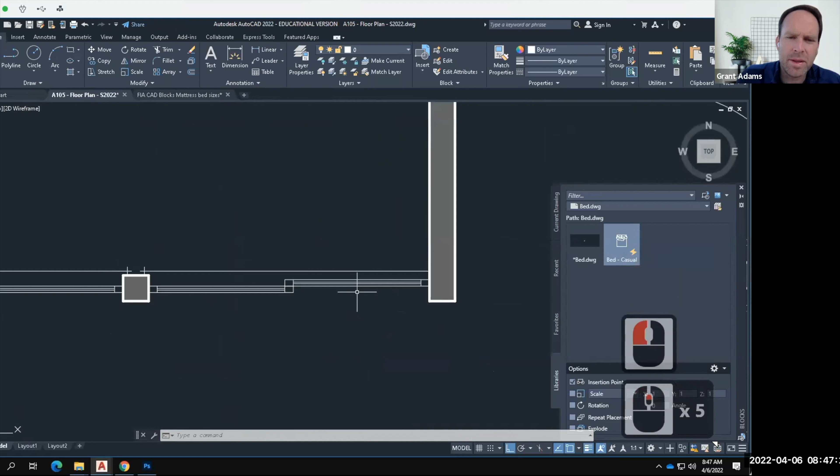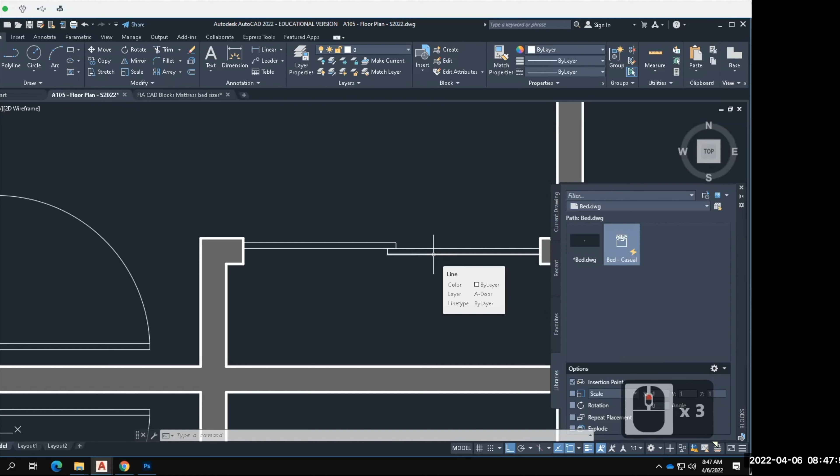These were actually meant to be sliders. Yeah, that's kind of what we did too. Exactly. So, mine might be slightly different. Style changes a little bit, but the idea is that they overlap one another and that they have glass in the middle. These ones over here were like closet doors, so sliding bypass doors. They don't have the glass in the middle. Okay, so, perfect. So if you're doing a slider, that's exactly how you would create it.

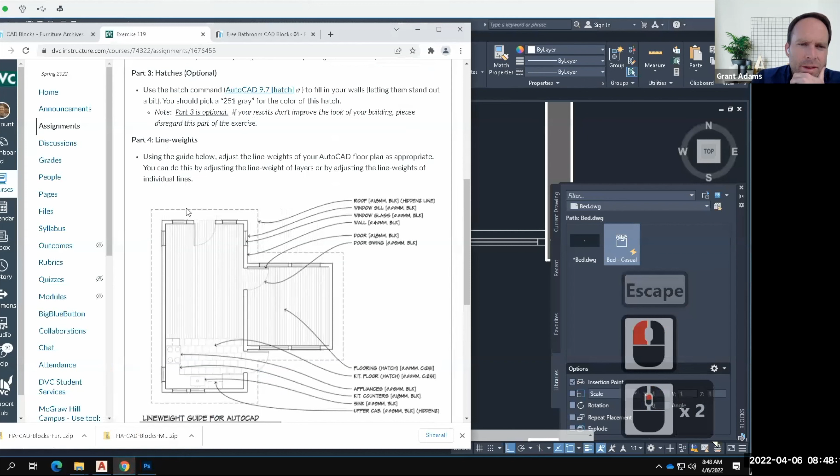Okay, cool. Thank you. So I should point out, when I get fancy, I tend to draw these little overlapping thresholds like this, just to indicate that there's a threshold. It's not at all required. You'll see on the drawing that I handed you here. Let's see, will it? Of course, it won't make it big right now, but I have those little overlapping pieces on some of the windows and whatever. That's a style thing, not at all required. So just because I show it doesn't mean you have to do it. Okay, sounds good. Thank you.